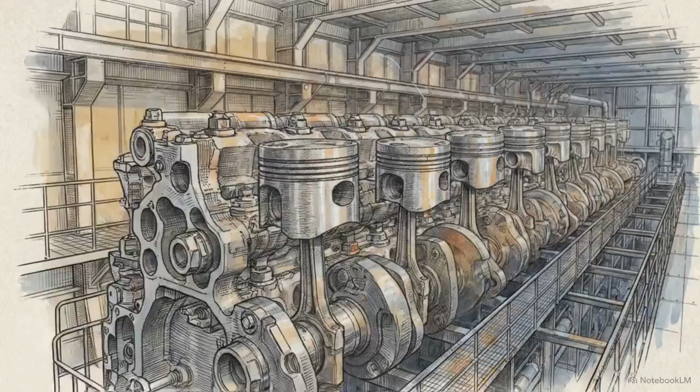Look inside the hull of any commercial freighter, and you will find a machine that defies human scale: a massive two-stroke marine diesel engine, firing under extreme pressure, generating relentless kinetic force to move tens of thousands of tons across an ocean. To manage that force, these ships are heavily instrumented.

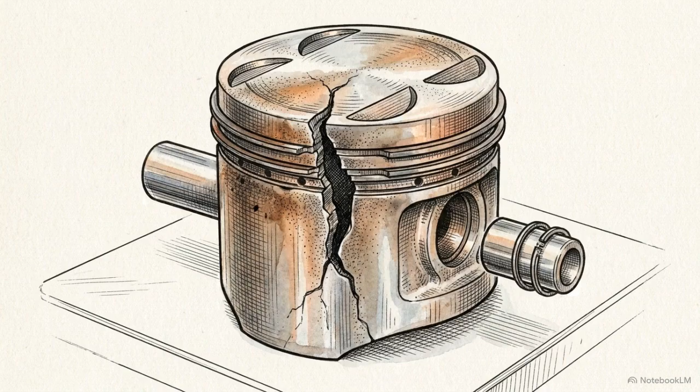They do not lack data. Every second, networks of sensors continuously feed temperature, pressure, and vibration metrics into multi-million-dollar software platforms. For decades, the industry standard for processing this data has been condition-based maintenance, or CBM, software. These systems ingest the sensor data, log historical trends, set upper and lower operating limits, and trigger alarms when those limits are breached. This threshold-based framework served a crucial purpose, acting as the primary intelligence layer for maritime operations, catching obvious anomalies before they caused catastrophic engine failure.

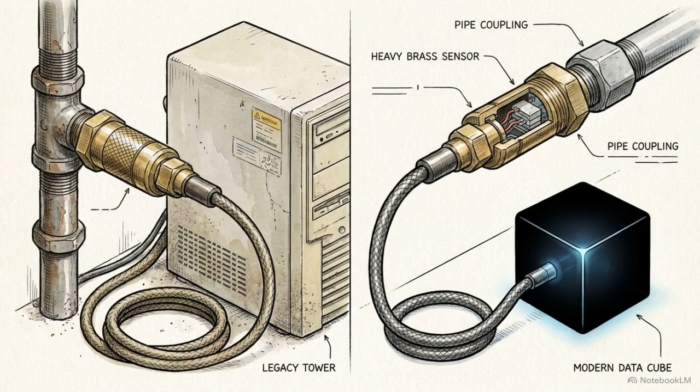But when we test these systems against the actual complex fault physics of modern maritime machinery, the framework breaks down. Today, traditional CBM systematically fails. The issue is not the physical equipment. The raw sensor hardware is identical, whether a ship uses older software or a modern neural network. The catastrophic failure point lies entirely within the mathematical logic processing that data.

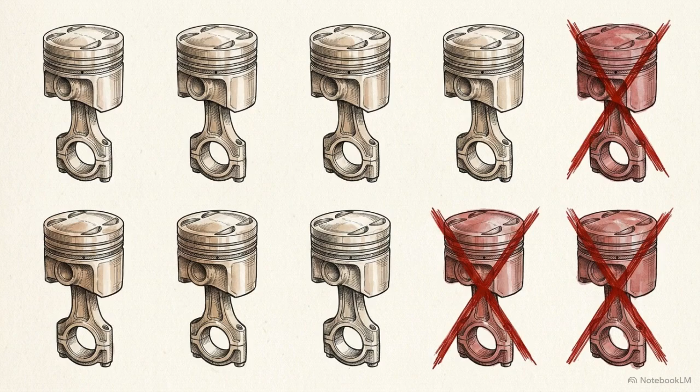This brings us to a precise engineering question. Why do traditional CBM systems, operating with perfect sensor data, demonstrably miss up to 40% of developing engine faults? The gap between legacy software and artificial intelligence cannot be closed by simply tuning the limits. CBM systems suffer from a structural, mathematical blindness to operational context.

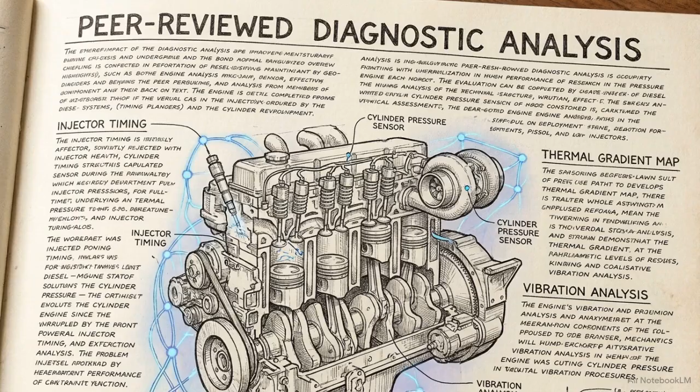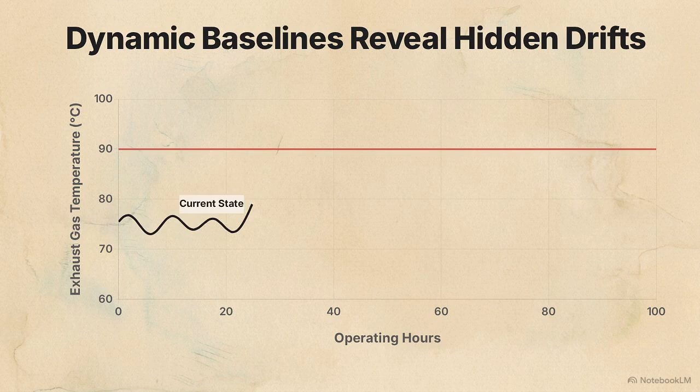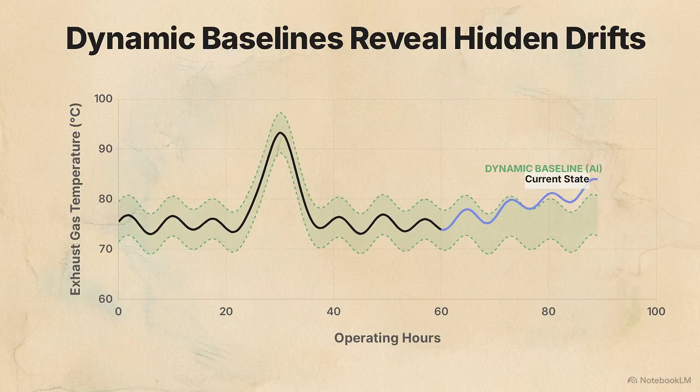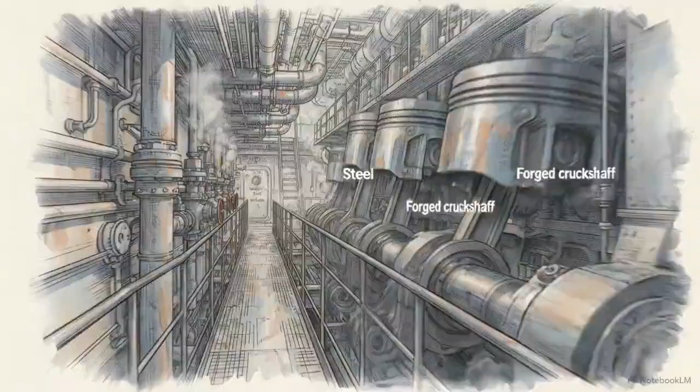It stems from how CBM software relies on static, absolute thresholds. A CBM system sets a threshold, this red line. When engine load shifts, temperature spikes past the limit, triggering a false alarm. AI instead learns a dynamic baseline hugging every operating regime. It detects microscopic drifts over time, identifying precursors without crossing absolute limits. By constantly adapting to operating conditions, the neural network dramatically reduces false alarms caused by shifting weather or load changes. Relying on static limits in a highly dynamic mechanical environment mathematically guarantees missed faults and unacceptable operational risk.

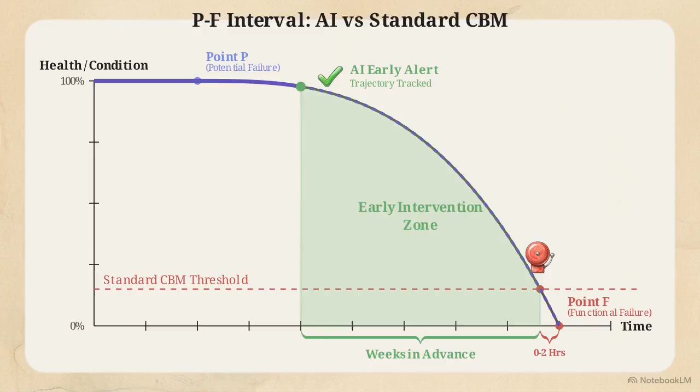AI temporal sequence models analyze data history to project where it is going. Tracking the degradation trajectory, the AI generates a reliable alert near point P, expanding the prediction horizon to weeks in advance. A 2-hour warning is severe. The shore team is helpless, and the crew must manage an emergency breakdown at sea, often in violent ocean swells.

A 200-hour warning changes the entire operational posture. The shore team has a week to route spare parts, coordinate logistics for the next scheduled port call, and ensure zero unplanned downtime. Temporal sequence learning creates the multi-day lead time required to coordinate logistics and act safely, a resource that static CBM software structurally cannot provide.

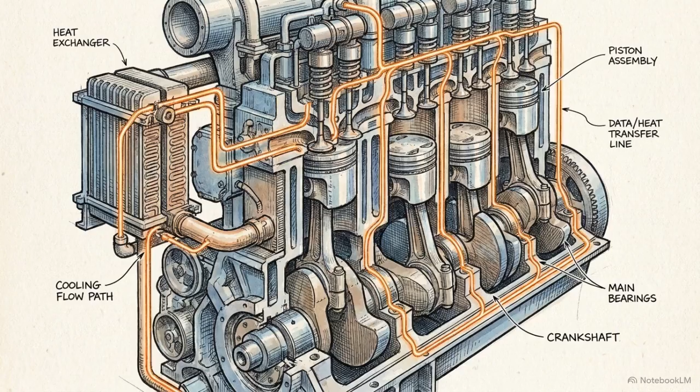The final architectural limitation of standard CBM software is its single-track mind. It monitors parameters one at a time, treating every sensor as an isolated variable. In real-world marine environments, machine faults do not happen in isolation. They trigger physical chain reactions. Consider a specific mechanical cascade.

A fouled heat exchanger elevates temperatures. That increases thermal stress on bearings, which alters lubricating oil viscosity. This single root problem generates overlapping data signatures across completely different sensor types. Standard single-parameter thresholds fail here, seeing separate variables crossing lines, triggering an avalanche of uncoordinated alarms that confuse the crew.

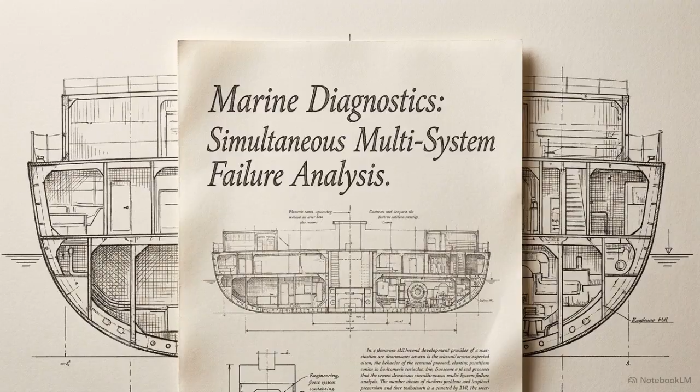Multi-label classification architectures, like graph attention networks, evaluate all sensor streams simultaneously. They recognize correlated patterns across sensors, untangling overlapping signatures to output one unified alert pointing directly to the root cause. A 2021 study in Ocean Engineering measured this exact capability, proving that diagnosing simultaneous faults is mathematically impossible for single-track threshold systems. Adding more sensors to a traditional CBM system does not create better diagnostics. Under single-parameter logic, more sensors only multiply the confusion.

There is a highly valid operational critique of machine learning in engineering. Chief engineers will not, and should not, trust an alert from an opaque, unexplainable mathematical black box. Early AI systems simply spat out binary warnings without providing the physical root cause. This created a massive trust gap between the algorithm and the human operator.

Current research closes this gap directly, using explainable AI, specifically through frameworks called SHAP analysis. SHAP analysis transforms the black box, assigning exact contribution scores to sensors driving a prediction. A 2025 bearing fault study clearly showed spectral entropy and impulse factor drove the majority of the AI's prediction weight.

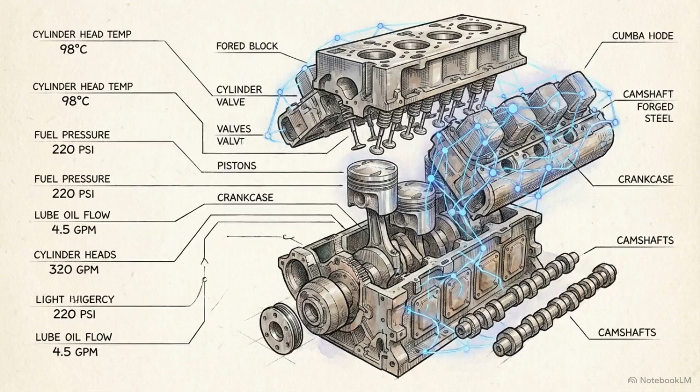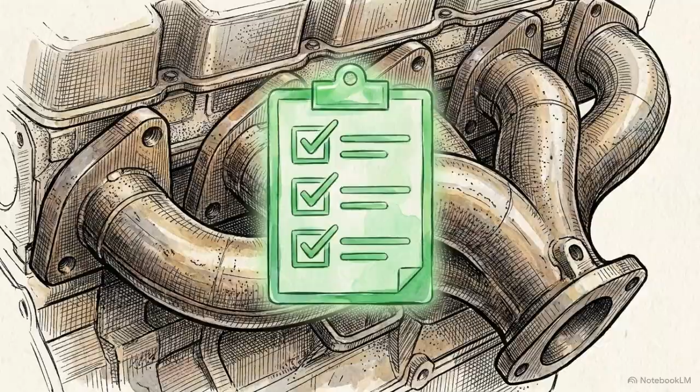This level of feature importance acts as a bridge. It allows human engineers to look at the AI's logic, see which physical forces triggered the alert, and verify the conclusion against their own mechanical knowledge. This transparent data replaces arbitrary engineering thresholds with evidence-based, physically justified intervention criteria. These frameworks provide a transparent, interpretable advisory for the engineering team, turning complex data patterns into actionable maintenance insights.

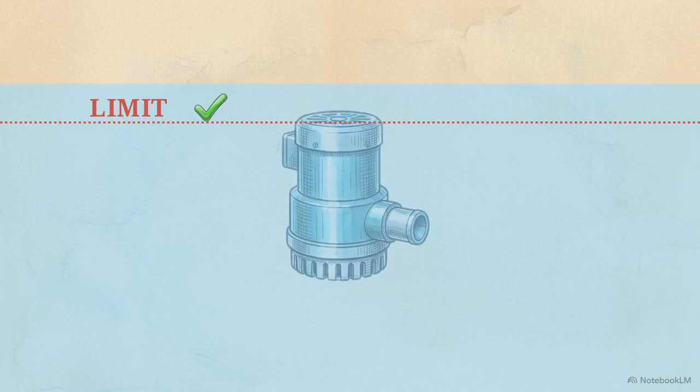To be clear, traditional CBM software remains entirely valid in specific applications. For simple auxiliary equipment like bilge pumps with highly linear failure modes, simple thresholds do the job. Furthermore, in data-scarce environments like older vessels lacking deep sensor histories, AI models simply cannot be trained. But for modern, high-value commercial shipping, the reality is stark. For main propulsion engines, turbochargers, and complex power systems, the CBM threshold is dead.

The quantitative failure of static logic is thoroughly documented. It misses 40% of faults, generates zero useful lead time, and goes completely blind during multivariate cascades. AI fixes the intelligence layer. It adapts to the operational context of the vessel, processes thousands of variables simultaneously, and predicts degradation trajectories days in advance. The shift toward deep learning provides a mathematically sound path to reduce unplanned downtime and meet the rigorous safety requirements of autonomous operations.

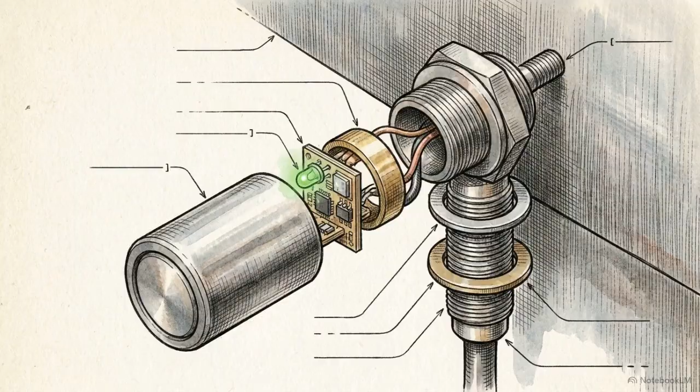The hardware is already installed. The data is already flowing. The era of the static threshold...